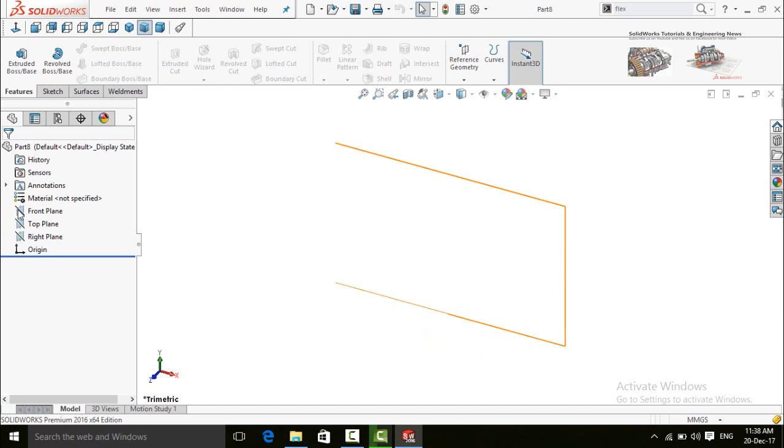From here on the left side we have three options: front plane, top plane and right plane. Click one of these three planes. Let's say click on front plane, and then an option bar will appear in front of you. From here select sketch.

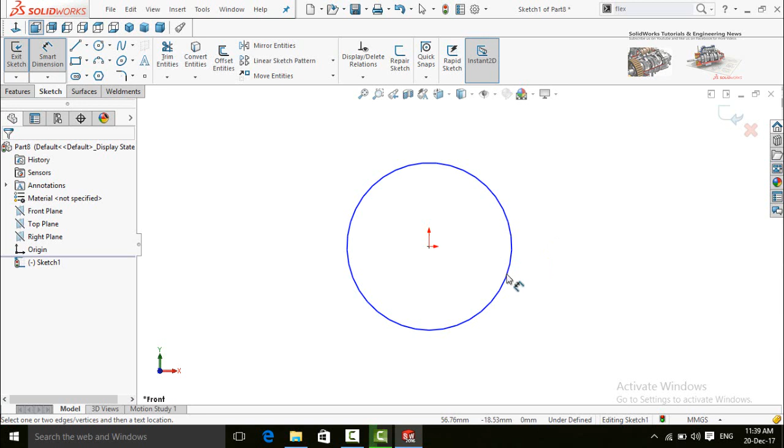Now in the sketch tab select circle and draw it from origin. Now define it by smart dimensions. You can select smart dimensions from here, and you can also select the smart dimensions by right clicking on the screen and then dragging your mouse upward. Click on the circle, and the diameter of this circle is 100 millimeter.

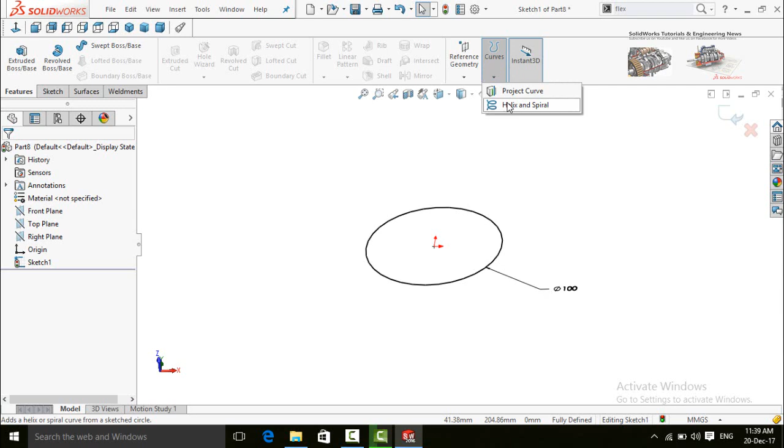Now we are going to convert this circle into a helix. So for that, go to features tab and click on curves button here. Select helix and spiral. There are two parameters of helix: first of all, constant pitch, and then variable pitch. So click on variable pitch. There are a few options: H is height, P is pitch, this is revolution, and this is diameter.

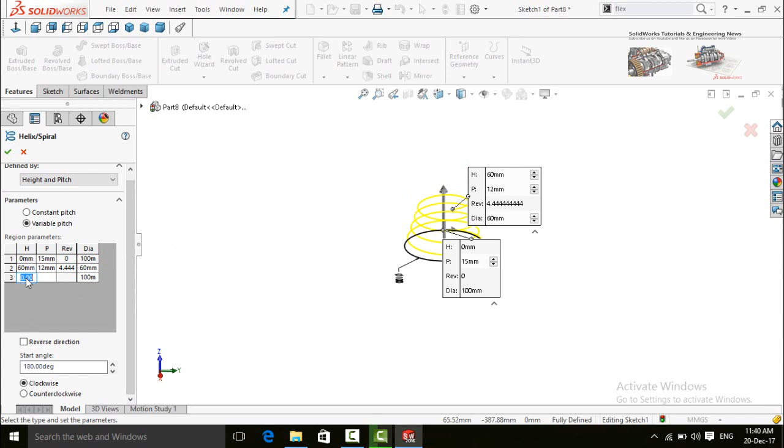So at the height of 0 millimeter, the pitch of our spring is 15 and the diameter is 100, and at the height of 60 millimeter, the pitch of our circle is 12 and the diameter of the circle is 60. The option 3, at the height of 100 millimeter, pitch of the circle is 8 millimeter and the diameter of the circle is 20 millimeter.

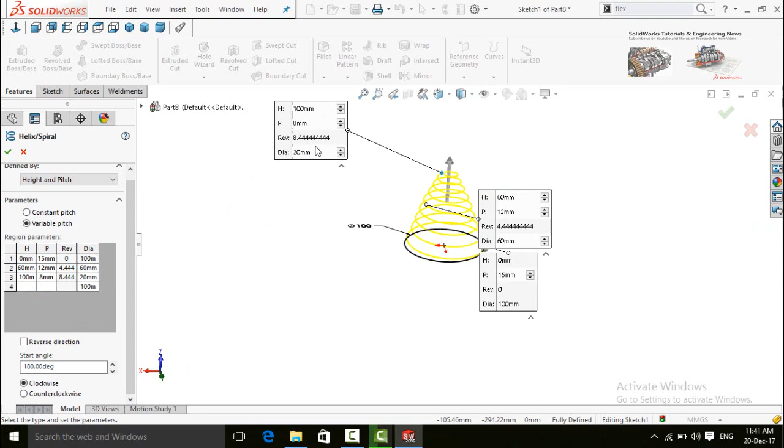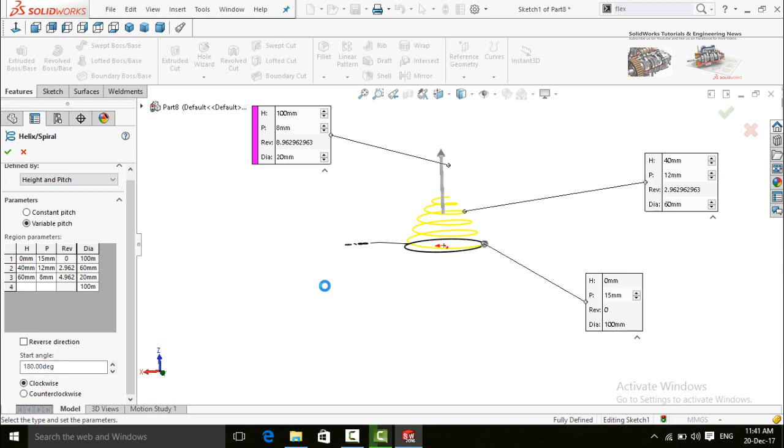You can also increase or decrease the sizes from here. So let's change the dimensions. Six zero is the height. Now total height is 60 millimeter. So press OK button to apply this feature.

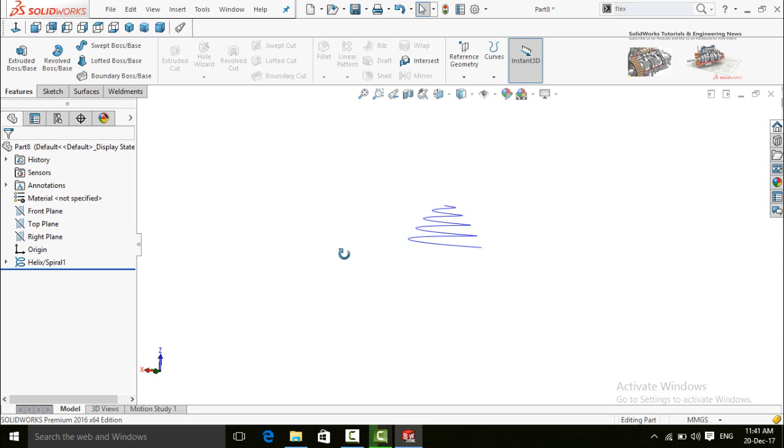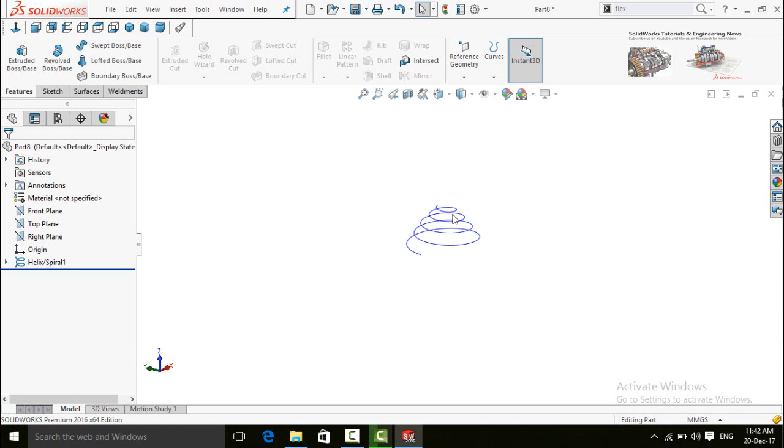Now I am going to convert this helix into a solid spring. So for that, in the features tab I have to apply swept boss base command. To apply this boss base command, we need two types of sketches: one sketch which will be used as a profile, and the second sketch which will be used as path. So this helix is our path, and we have to create a new sketch as profile.

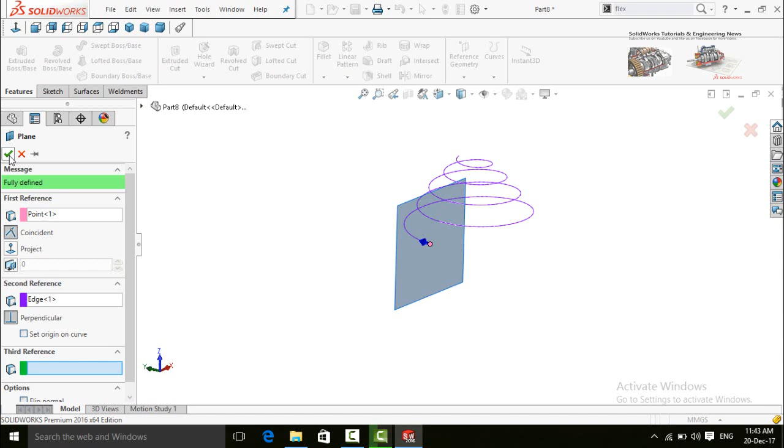We need a plane on this point. So for that, in the features tab, click on reference geometry and then select plane. Select this point as first reference and then this helix as second reference. Now you can see it is fully defined, so press OK to create this new plane.

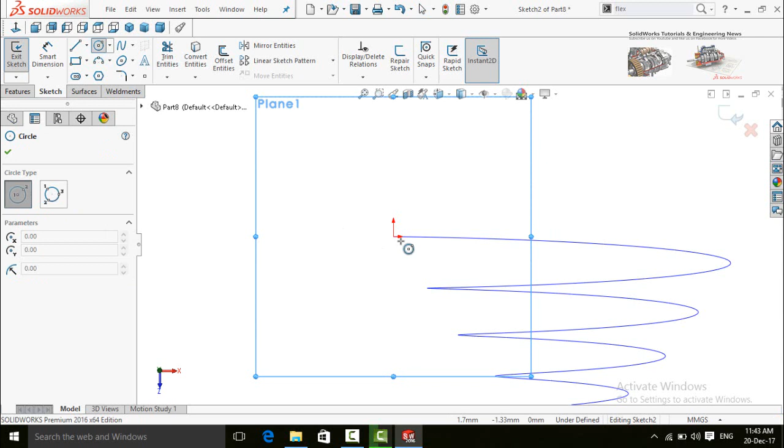So new plane is now created. Click on it and sketch. Make normal to by pressing this button or Ctrl+8 key from your keyboard. Draw a circle and start it from origin. Now define it: 8 millimeter. Press this button to save the sketch and exit from it.

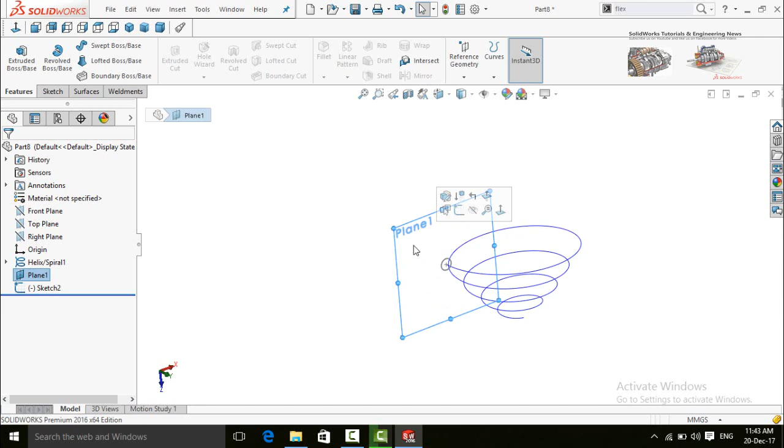As this plane is irritating, click on it and then select this button hide. If you want to unhide this new plane 1, on the left side click on this plane 1 button and then select show button.

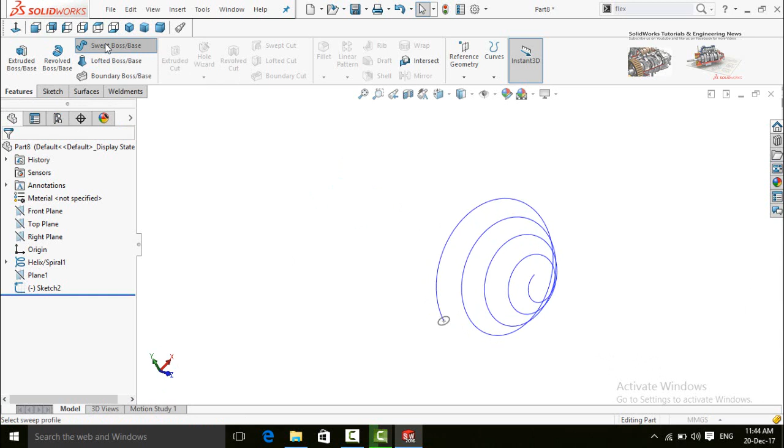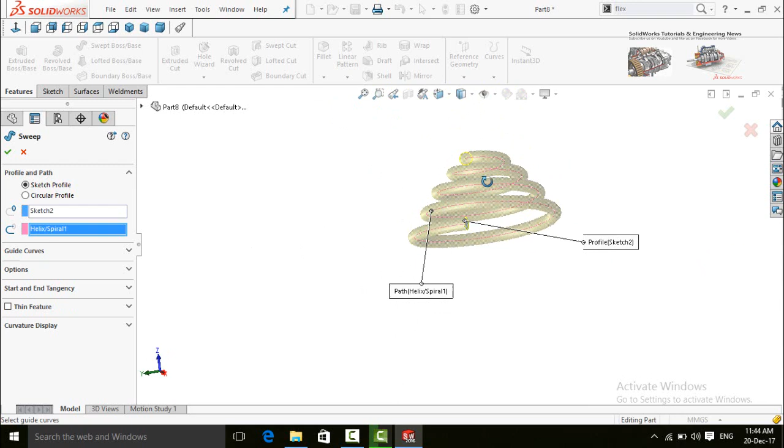So now we have to apply swept boss base feature from features tab. Click on swept boss base command. First box is profile and the second box is path. So this circle is our profile and this helix is our path. This is the preview for the spring. Press OK button.

Click on this helix blue line. An option bar will appear and from here select hide.

So this is how to create the variable spring in SolidWorks.